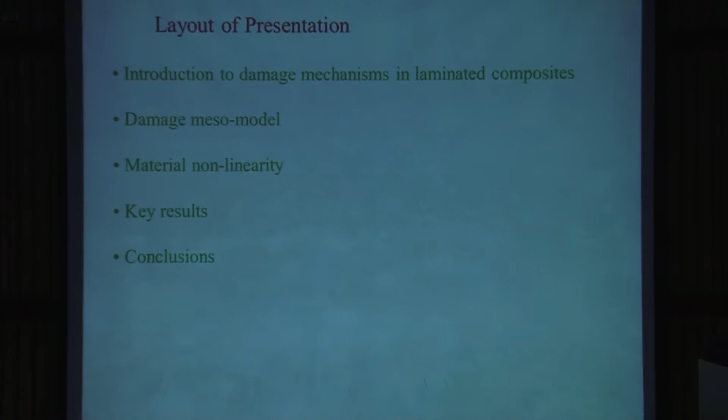So this is the layout of my presentation. First I will introduce various damage mechanisms in the laminated composites. I will be talking about the unidirectional fiber composite. Then I will talk about a particular damage meso model, introduce what is meant by damage, what is meso model, and where you get this material non-linearity. Then I will present some key results and conclusions.

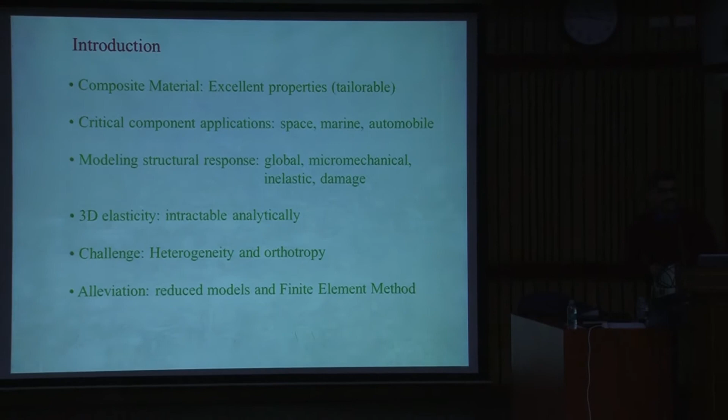As you know, these composite materials have excellent properties, such as specific strength, stiffness, and so on. Depending on that, you have different applications. One of the important properties of these materials is that you can tailor any of the properties. That is the biggest advantage of the composite.

So they find applications in critical components in the space industry, marine industry, automobile, civil, and many other applications. When you are talking about these critical applications, you are also talking about modeling the structural response. This can be a global response, a micromechanical response, inelastic or plastic, and damage. As far as I recall, some of these things have been talked about already - for the global response, I think buckling has been covered. I think we will be talking about snapback and other things - Professor Padevi is going to talk about that.

I think this part is micromechanical - are you doing any micromechanical? No, no, okay, so this part is not there. But I think Professor Pritam Chakravarti is going to do the inelastic part and the plasticity part. So I'm going to fill this damage part.

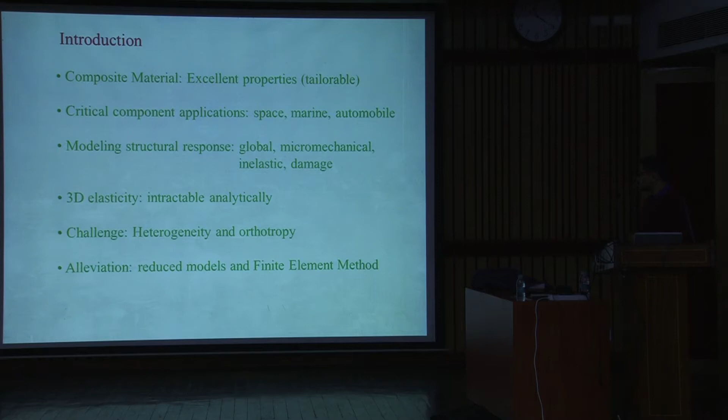So there's one more challenge when you go for composite material - that is heterogeneity. This composite material is composed of two or more different materials, so it leads to heterogeneity, and another thing is that it is orthotropic in behavior. Unlike metals, which are generally isotropic, this is orthotropic in nature. So what is done in case of composite modeling is that you use reduced models - you make some assumptions depending on your structure, orthotropy, heterogeneity, and so on, and then you come down from 3D to 2D or 1D line. Once you do that, you find approximate solutions by using the finite element method.

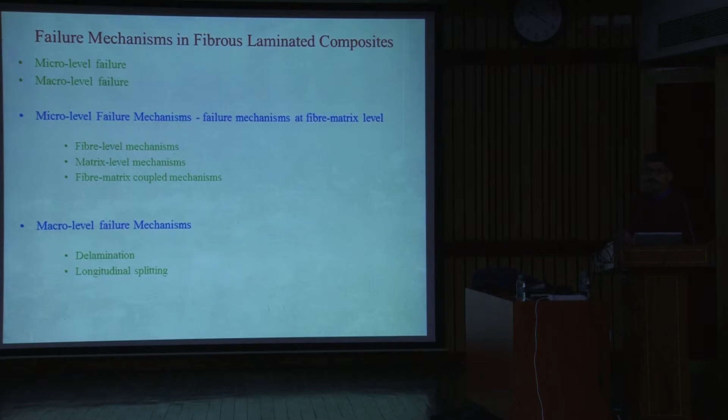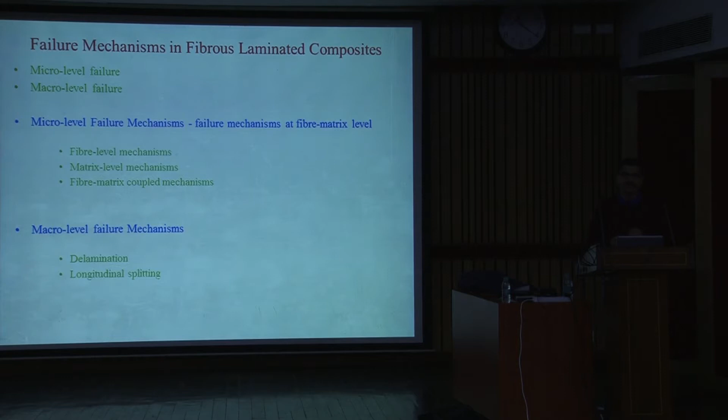So I will now introduce the failure mechanisms that are generally seen - these are the key failure mechanisms in fibrous laminated composites. These can be categorized at two levels: micro level failure mechanisms and macro level failure mechanisms. Micro level failure mechanisms are the failure mechanisms at the fiber and matrix level. Since I'm sure you are aware of composite materials, I'm talking here about fiber reinforced polymer composites - fibers of carbon and glass.

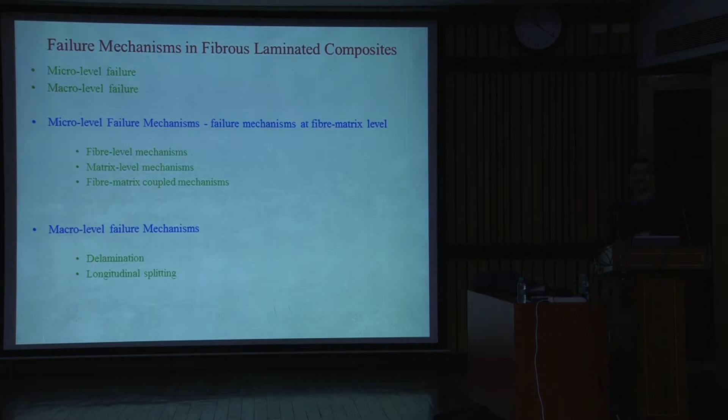These fibers are generally in micron sizes. The diameter of the carbon fiber is about 6 to 8 microns. In case of glass fiber, it is 15 to 20 microns and so on.

So you are talking about the failure mechanisms at the fiber level. That is why they are called micro level failure mechanisms. Again, you can categorize them as fiber level mechanisms, matrix level mechanisms, and the coupled mechanisms. So failure in fiber will lead to failure in matrix, or failure in matrix will lead to failure in fiber. These are the fiber-matrix coupled mechanisms.

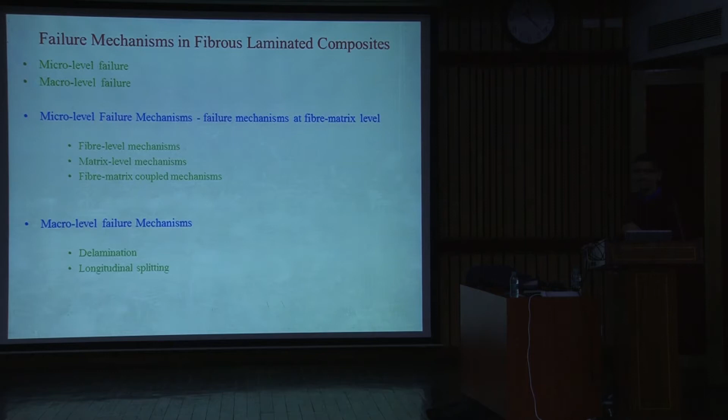Then we have micro level failure mechanisms. Generally these happen in a ply, or in a single lamina, so these are also called intralaminar failure mechanisms. Whereas the macro level mechanisms happen at the level of structure. One of them is delamination, and the other is longitudinal splitting, or a coupled macro mechanism. I will show those pictures.

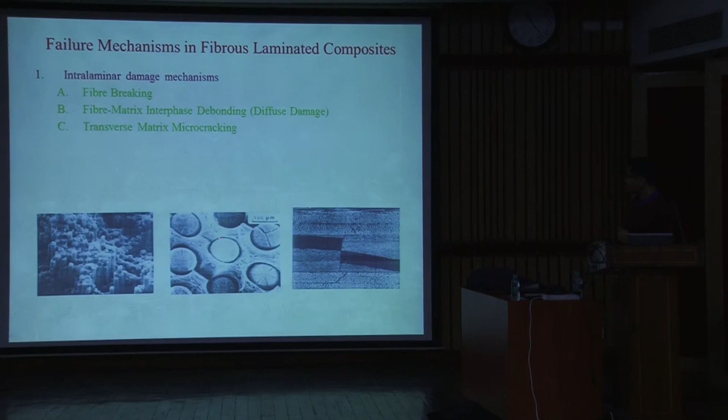Then you have fiber matrix interphase debonding or diffuse damage. This micrograph shows the fibers - these circles are the fibers, and this is the matrix material. The bond between fiber and matrix becomes weak, and there is a failure. This is called diffuse damage.

Another form of damage is transverse matrix cracking. What happens is there is a crack in the ply. This is a laminate, so it has different plies together. In this ply, the fibers are going into the screen. You can see here that there is a crack going through the thickness of the ply. Similarly here there is a crack going through the thickness of the ply, and similarly here.

This happens when the longitudinal strength of the fiber is exceeded. At that time it fails. This is one of the reasons.

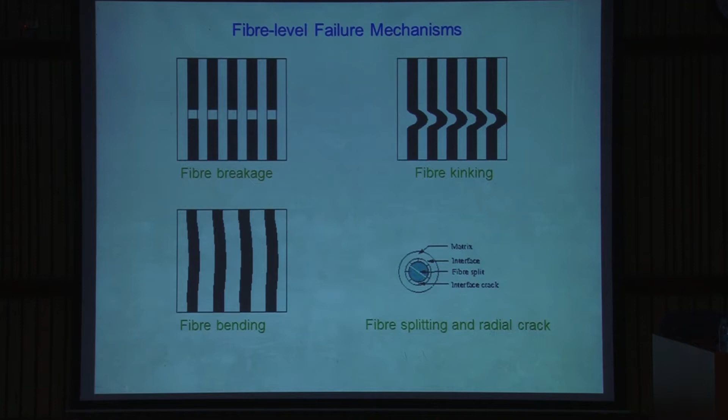Then another is fiber kinking. As I said, these fibers are very thin - just 8 microns or 20 microns - and they come in a bundle. You will have a bundle of 6,000, 12,000, or 18,000 fibers or so. You cannot have individual fibers alone; they come in a bundle. Because of handling or some other reason, it is possible that it may have some kinks at some places. This is called fiber kinking.

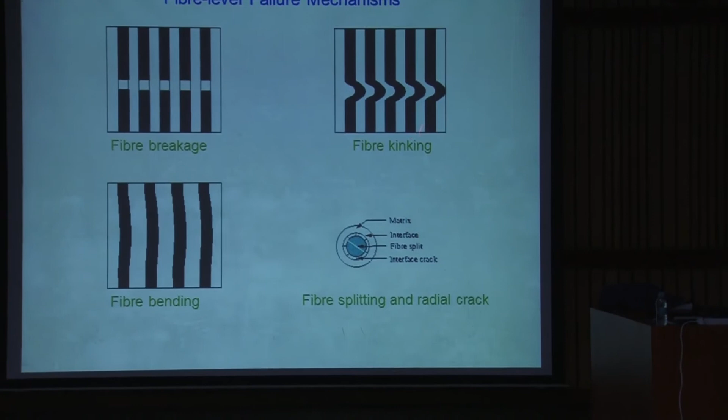Another mode of failure is fiber bending. These are long fibers, so when you are putting them in the matrix material, or making the composite material, it is possible that you are not stretching them sufficiently, and when they are set or cured along with the matrix material, it is possible that there is a bending in the fiber.

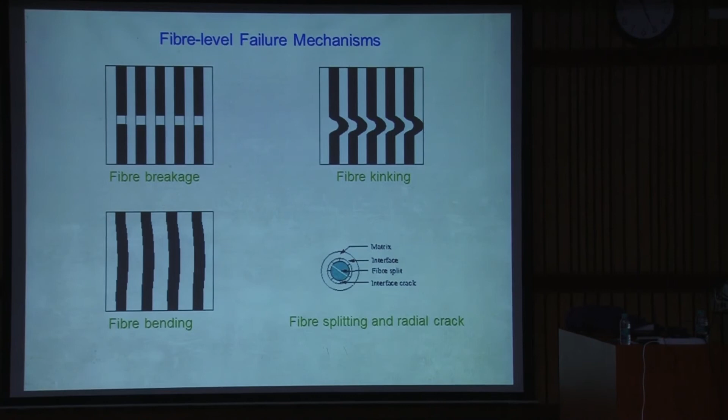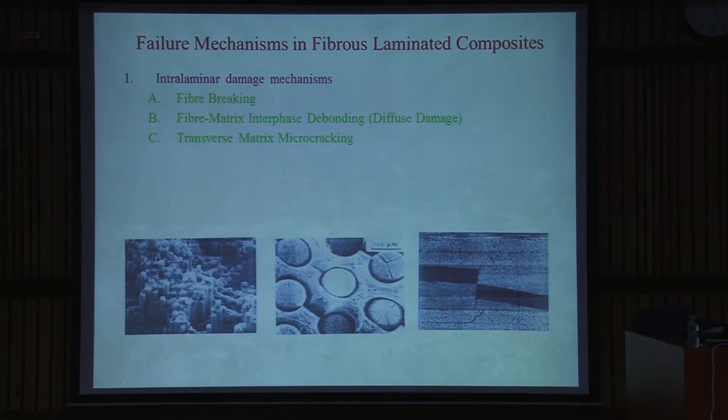This is one more level of fiber failure - fiber splitting and radial crack. Let me go to the previous picture. As I can see here, this is the fiber, split along the radial directions. Here it is split in two halves, whereas here you see that there are radial cracks developed into this.

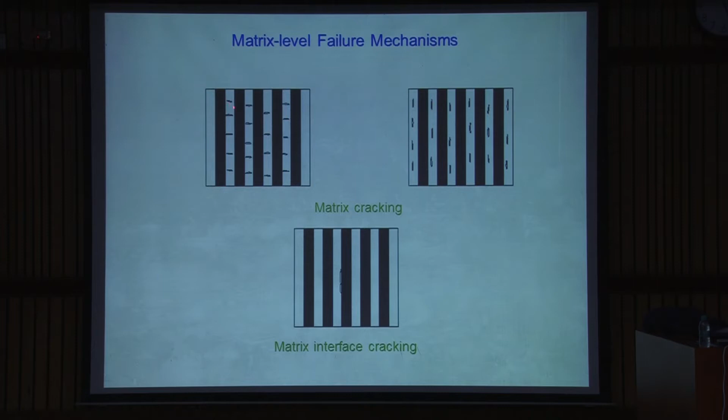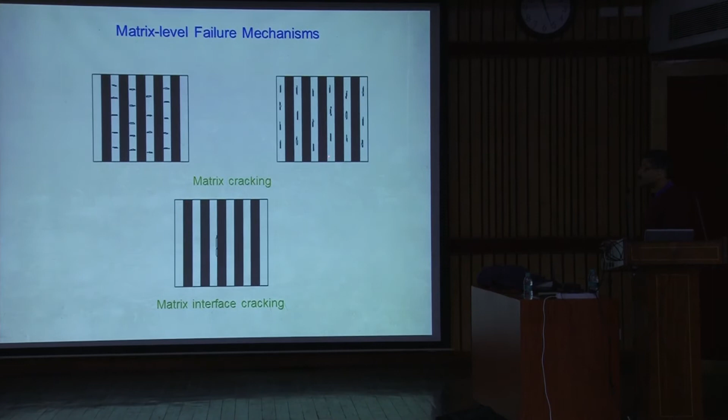Another level of failure is that this matrix between the adjacent fibers can develop cracks. There are two types of cracks: one where these cracks develop perpendicular to the fiber length, and another where they develop along the fiber length. Depending on the loading and the strength of the matrix material, either of these is possible, or both.

Then another type of failure is matrix interface cracking. What happens is that at some places there is not a proper bonding between fiber and the matrix, so the interface between this fiber and the neighboring matrix is weakened and it develops a crack.

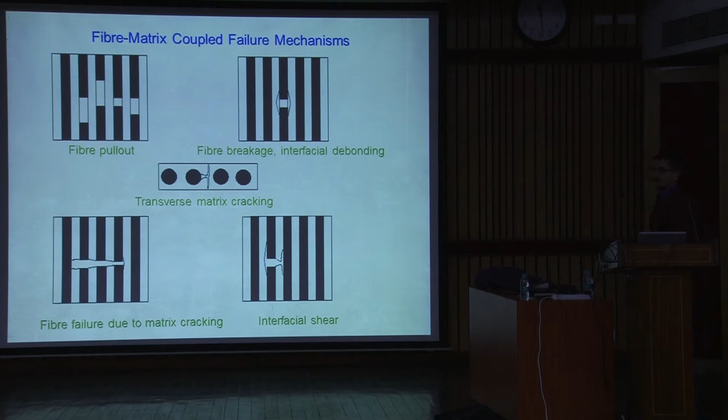At the macro level, this happens at the structural level when you have two plies joined together - there is a separation between these two plies. This can be internal, at the edges, or anywhere, depending on the loading situation and the structural detail levels. This separation is called delamination. I have the same picture again in the next slide, I will explain that.

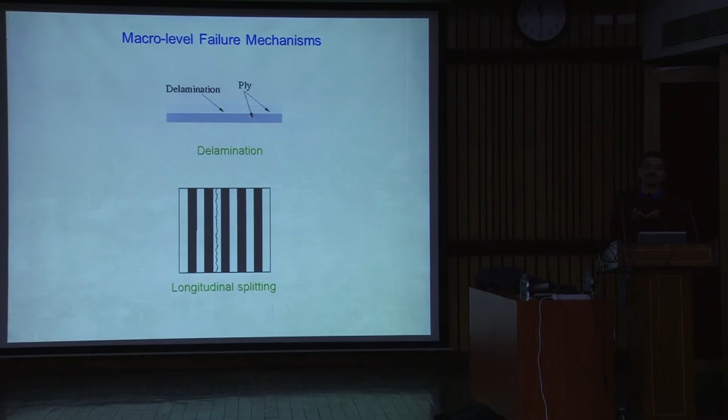As I said in the previous slide, the ply can split along the fiber. The crack that develops in the matrix material goes along the fiber length through the thickness of the ply, and the entire ply is separated. This is called longitudinal splitting.

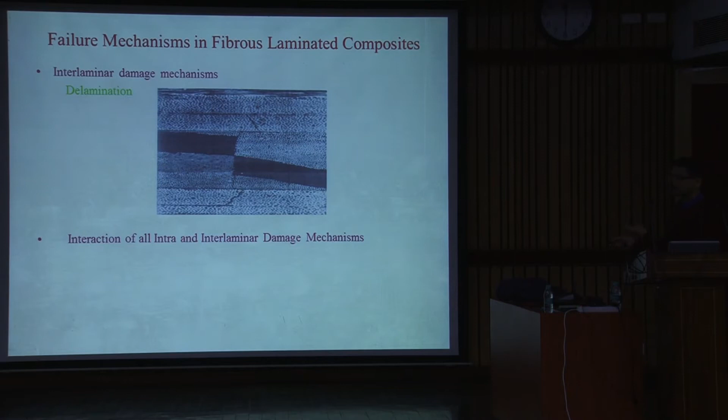So this is the delamination. As I said earlier, there are many layers, and what you see here is the interface between this ply and the next ply. This black region is nothing but these plies having been separated - they have delaminated and come apart. The bonding between these two plies has become weak due to the loading or some other reason, and then it separates.

This shows the interaction between intra and interlaminar damage mechanisms. There was a delamination propagating like this, then it sees that it cannot propagate along this interface anymore. So it found a weak direction in the ply itself - the interfacial crack or delamination that was growing along this path moved in the thickness direction and goes into the next interface.

Then again it sees that the next interface below is weak, so again it propagates like this. Also here, when it was separated, it found there was a weakness in the ply, which led to the crack. So these mechanisms are coupled - this matrix transverse cracking can lead to delamination, or the delamination can lead to matrix transverse cracking. These are the coupled mechanisms.

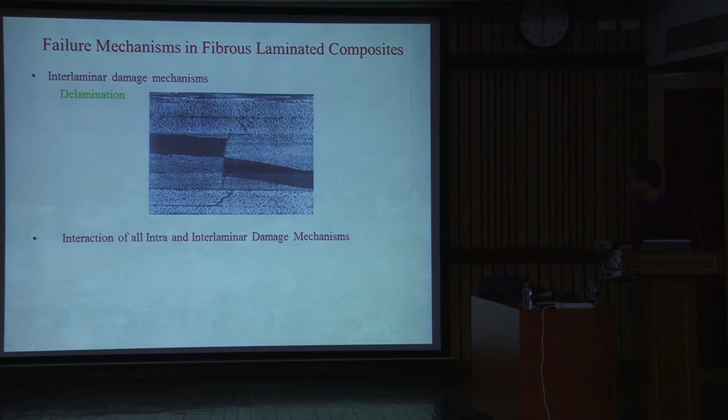Okay, so with this introduction to the various damage mechanisms, now let us see how do you take care of this failure. These failures are at the macro level, so how do you take care of this failure, or how do you characterize it and how it is taken care of in your material behavior.

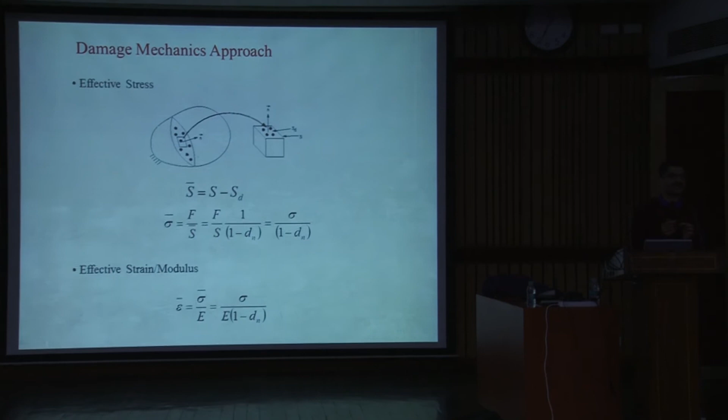So this will go maximum to 1. When SD becomes equal to S, then it becomes 1, and when SD is 0, Dn is 0. So that means your damage parameter will vary between 0 to 1. 0 means there is no failure, and 1 means it's complete failure. So this is how your effective stress has been represented.

So if I further work with the stress-strain relation, then I can also define the effective strain. If I do that and replace this effective stress, then what I see here is the nominal stress divided by E times 1 minus Dn. So E is your original stiffness. Now, because of the damage, it has been reduced by this factor 1 minus Dn.

So the effect of this damage can be characterized in the material through the reduction of the stiffness. This is just one simple example where the concept of the damage variable, effective stress, effective strain has been introduced, and how you take care of this damage through the reduction of stiffness. This is the source which will give the nonlinearity, because as your load is changing, these things are changing, your stiffness is changing.

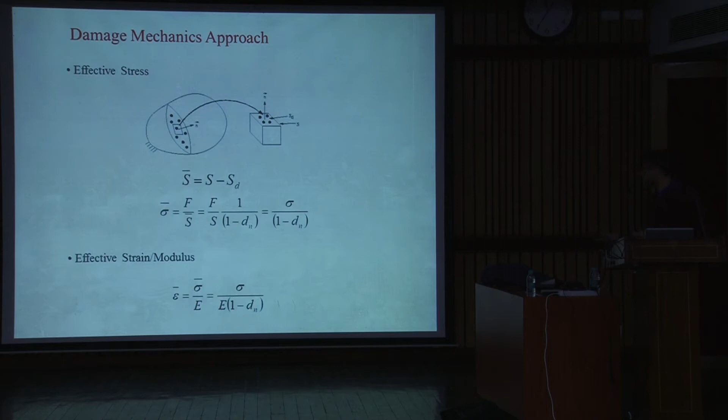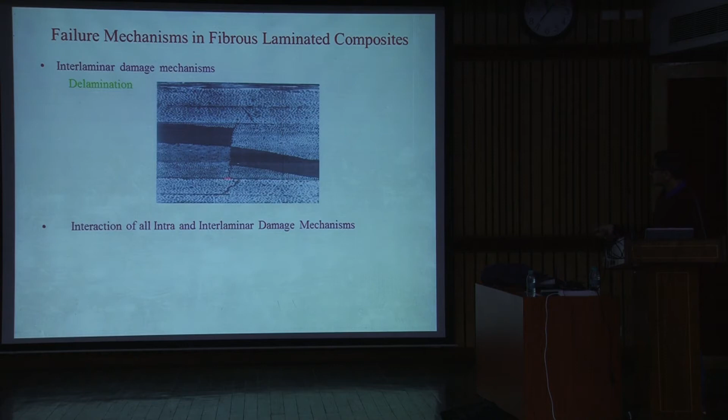So the first assumption that is made is the mesoscale. It means you are breaking, or assuming, this laminate as alternate stacking of layer and interface. Layer means you have the matrix and the fiber, and in the interface it is pure matrix material, a very thin layer made up of matrix material. So you are talking about these scales - this is the ply which is of thickness 0.15 or 0.125 millimeter, that is about 125 microns. So this is the scale you are talking about.

This is neither the micro nor the macro scale. So this is in between that. That is why it is called mesoscale.

So you are characterizing the failure in individual ply and individual interface, and these two things will combine alternately to form the laminate. So this is the first assumption.

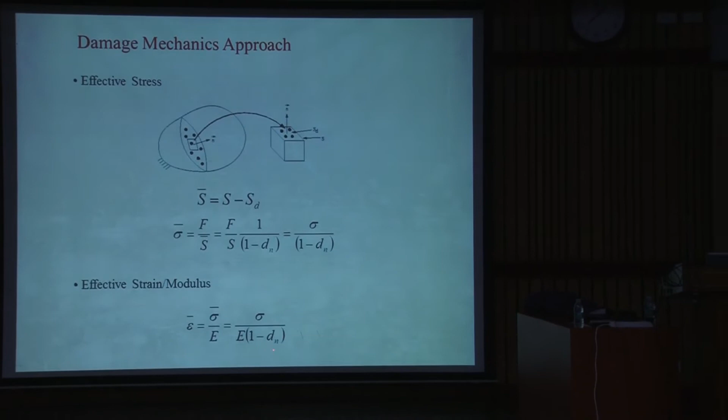The second one is the internal variable approach. It relates the effect of damage to mechanical behavior. So this is the same thing I said, it relates the effect of damage to the mechanical behavior. So your E gives the stiffness, that is the mechanical behavior.

So your Dn is called the internal variable. Okay.

Then the method of local states. It relates the damage to the thermodynamic forces associated with the strain energy. This thermodynamic force is nothing but the dual of this damage indicator. So when you have this damage indicator and thermodynamic force together, it will give you back the energy, or strain energy, or the free energy.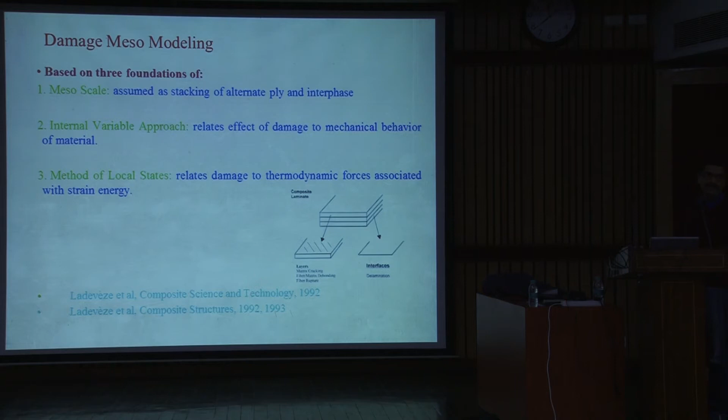So with this, now we will do step by step how these different failure mechanisms affect your stiffness. In this development, only the key or important failure mechanisms have been considered. The first one is fiber failure.

As you know, in the composite, fiber is the main load carrying constituent. So majority of the load, when it is applied along the fiber direction, is carried by the fibers. If the fiber breaks, because it has more stiffness compared to the matrix material, the stiffness of the lamina decreases drastically. So this is one of the important failure mechanisms.

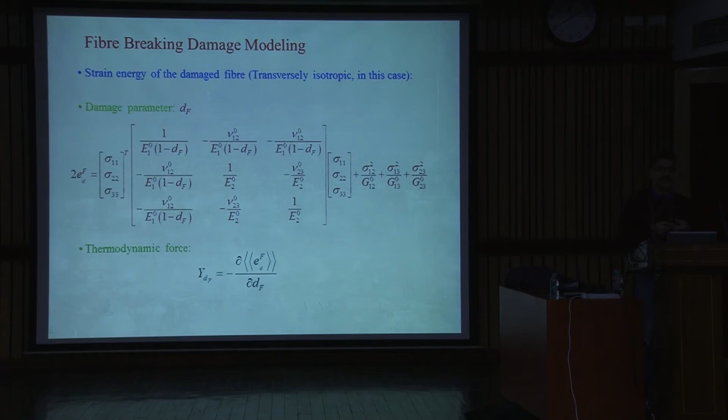So one more assumption is that when you are considering the fiber failure, it will affect only the modulus in the fiber direction. Its effect on the failure in the other direction is lesser. If the fiber is broken, then it is almost catastrophic failure. There is no chance that you will have some failure in the other direction and then this will fail. So it is the assumption that if the fiber is going to fail, it is going to affect only the stiffness in the fiber direction, that is direction E1.

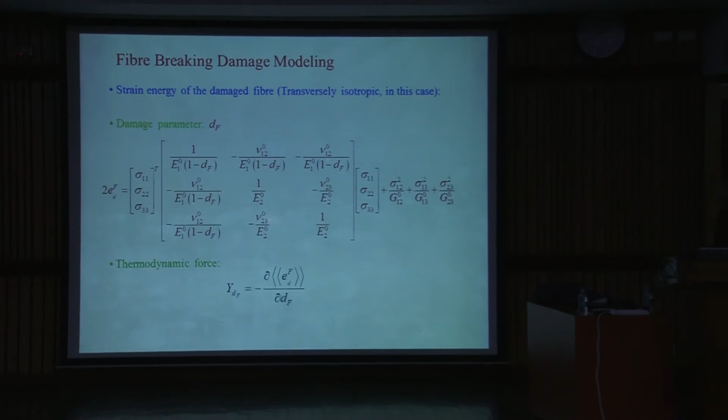As we said, this material is orthotropic, so you will have E1, E2 and E3. E2 and E3 are the same because this material is transversely isotropic, meaning the behavior in the 2 and 3 directions are the same, but in the 1 direction it is different.

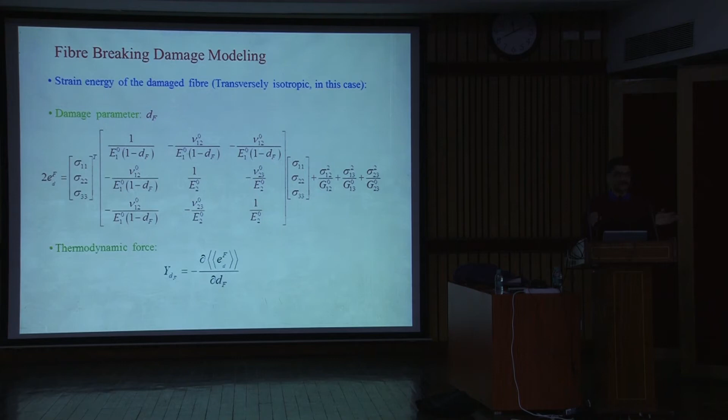So this is the strain energy of the damaged fiber, given like this. It is affecting only the Young's modulus in the length direction of the fiber, not affecting any other direction. And if this is your strain energy, then you can define the thermodynamic force in this way, where dF is the damage indicator for fiber failure.

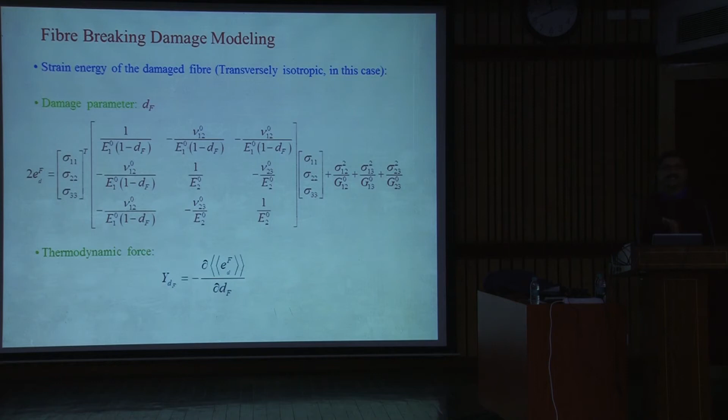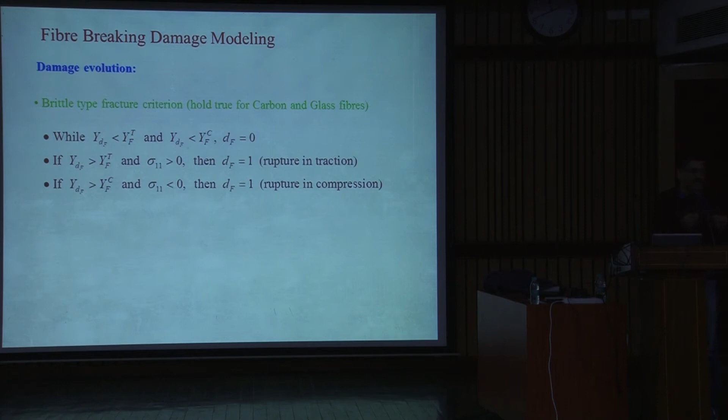So how do you evolve the damage? You are talking about now when it is going to happen, and when it is happening, how it will propagate. So you are talking about the initiation to its last stage. In this case for the fiber, you are talking about this thermodynamic force.

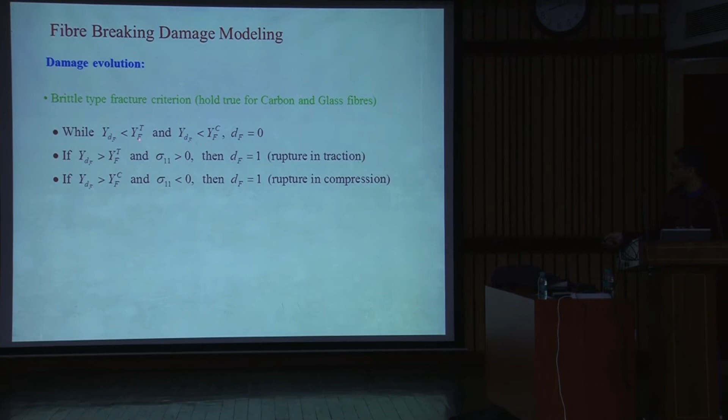So if this thermodynamic force, whatever you got, is less than the thermodynamic force in tension and compression, these critical ones, YFT and YFC, correspond to the maximum strength of the fiber in tension and compression. I can do a similar thing here for maximum stress in the fiber for tension and compression, so that is basically the fiber strength in tension and compression.

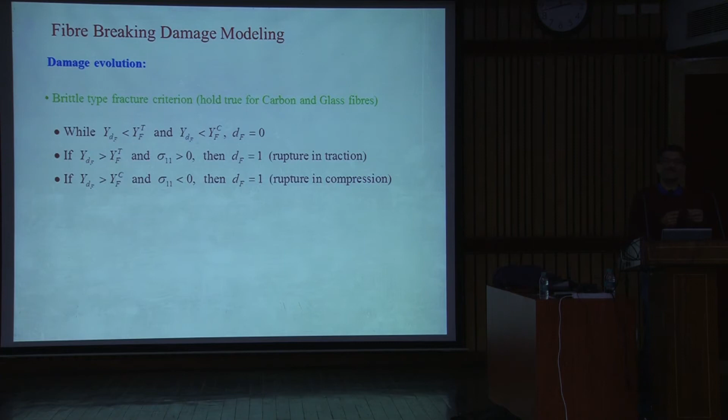Then, if the stress in the fiber along the fiber direction is tensile, I will compare it with the tensile critical thermodynamic force for the fiber. If it is more, then I will have this damage indicator as 1. Why am I putting 1? Because for carbon fibers and glass fibers, the failure is brittle. So either it will go on stretching until ultimate failure, there is no failure increasing step by step. It is either intact or complete failure. So that is why it will be either 0 or 1, both in tension and compression.

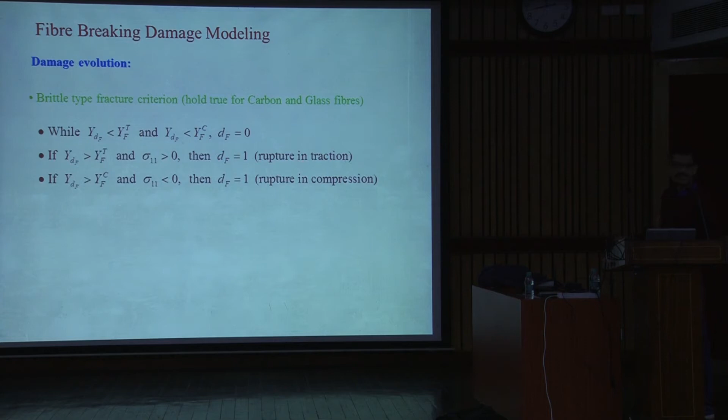So now for the case of the fiber matrix debonding, there are different things happening. You have the bonding between this fiber and the matrix. If it is weakened, then what is going to happen? In this direction, the strength is reduced. In the shear also, it will be reduced in this direction as well as in this direction. So because of this, you have the effect of these damage indicators.

So 2,2 means in the normal direction to the fiber, then 1,2 and 2,3 are the shear effects. So your damage in the interface is going to affect your E2 modulus, and then also it is going to affect the shear moduli. There is one more assumption, that this damage is considered to be transversely isotropic, so whatever you have in this direction is also in the same direction, meaning in the plane direction as well as in the thickness direction.

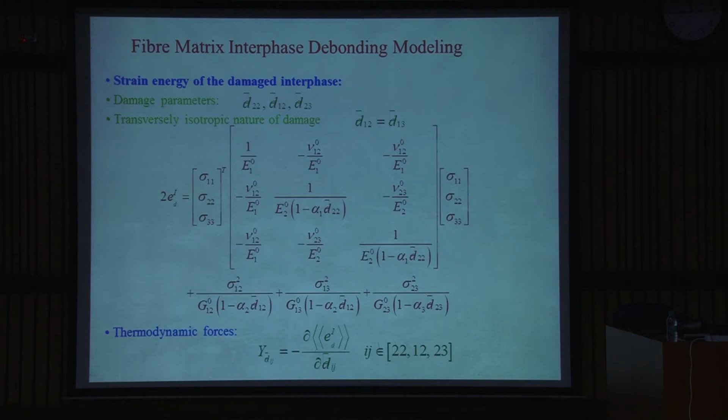So if I am considering only the fiber matrix debonding, and if I consider all these effects, then the strain energy that I get is this, and for these damage parameters I can have the associated thermodynamic forces which are defined like this.

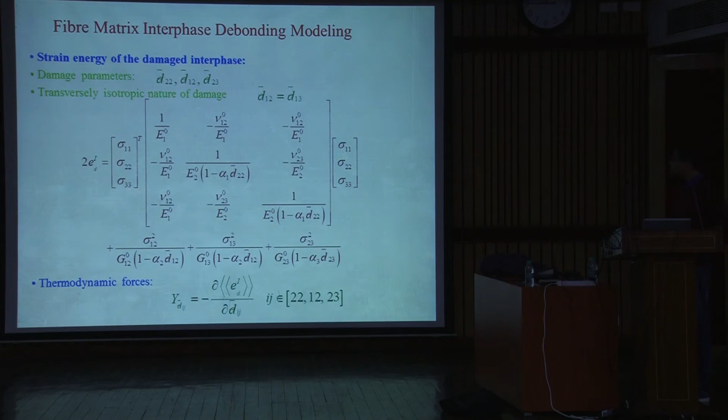But still this also happens, and its effect is less than 5% on the material degradation, and sometimes it goes undetected. So when you are characterizing, or doing the NDT, you should be very careful to quantify these numbers.

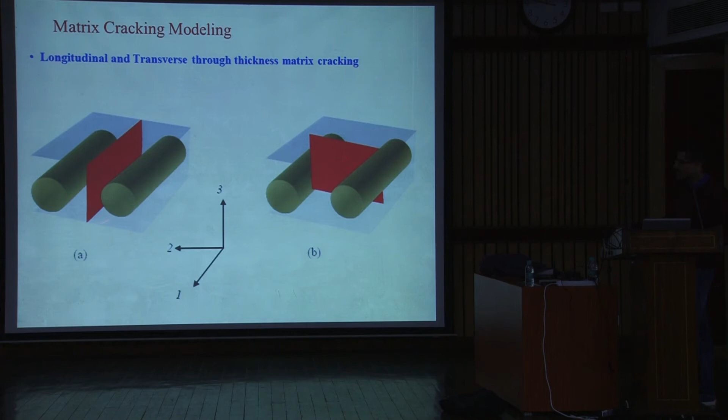So if I consider that matrix cracking, then what is going to happen? This is going to affect your strength or the stiffness - stiffness in this direction, longitudinal the fiber direction, and then in the shear directions. So my stiffness in the longitudinal direction, perpendicular direction to the fiber in this plane, and in the shear is going to be affected. So these parameters are, now you see, affecting your stiffness in two directions and the shear.

So for this strain energy, now you can again define, or you can get this associated thermodynamic forces for these damage variables.

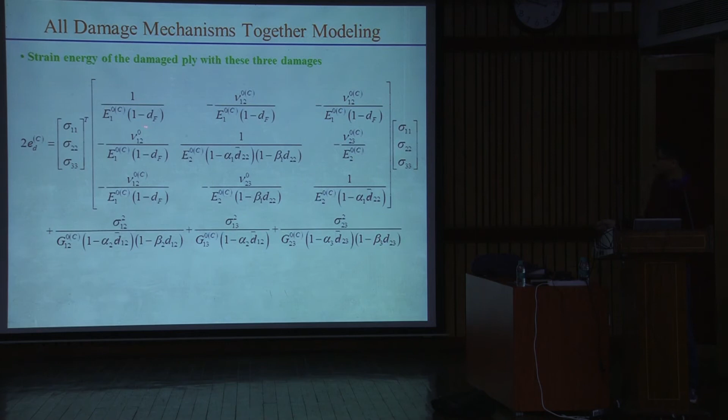So what we did is that we consider these different mechanisms together now. Individually, first we talked about the fiber failure, then how it is going to affect the stiffness matrix, then we talked about the fiber matrix debonding, and then we talked about this matrix cracking. So when we put all these things together, this is what I will have in my stiffness matrix.

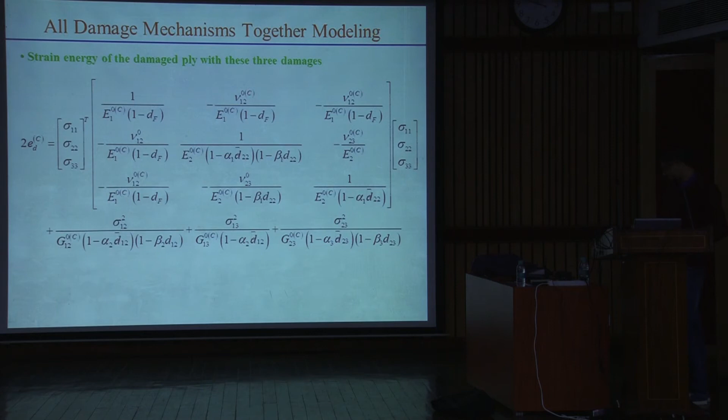So now what is left? Now the failure at the macro level, that is the delamination. In delamination, the initiation is given in terms of von Mises stress criteria, because the matrix material is assumed to be isotropic in nature.

So I can apply von Mises stress criteria. But for the propagation, what we are doing is defining the strain energy of the damaged interphase. So you will have the damage propagation for delamination in 3 modes: mode 1, mode 2, and mode 3, sliding mode and opening mode.

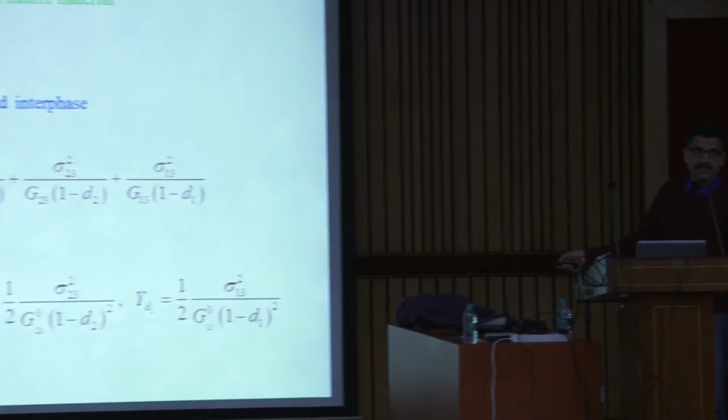So you have 3 different modes. For each mode, now you have different indicators. In case of the opening mode, the crack will propagate, it is assumed the delamination will propagate only when the stress is tensile. If it is compressive, then there is no damage developed into that.

So this is the strain energy of the damaged interphase. Corresponding to each damage indicator, you can define the thermodynamic force. What is it?

Yeah, you can do that thing, but von Mises is like you are considering all the things together, it's an energy based criteria, so you have all the things together. You can also do that thing for that. So here also you can do that thing. If you want, you can check the individual one and then you can do that.

But whereas for the initiation, that is more appropriate in case of isotropic material. So that is why von Mises criteria.

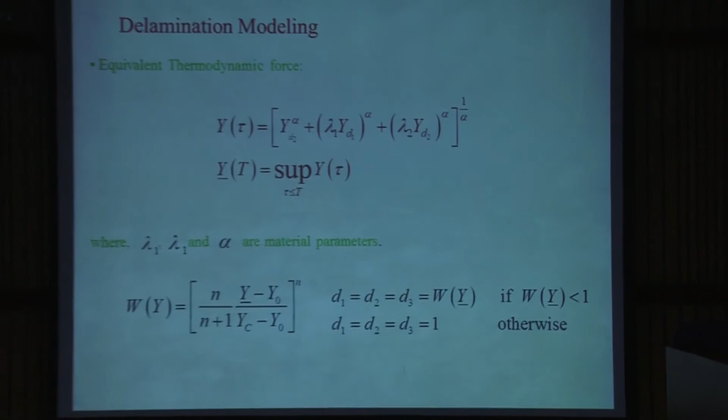For the propagation, what is done is now you are talking about 3 modes. I don't want to do individual mode one by one, so what is done is you define equivalent thermodynamic forces when you are having all the 3 modes. This thermodynamic force is basically trying to capture the mixed mode failure. Whatever is written here is just a modified form of the mixed mode fracture.

Of the delamination, depending on that you will have this lambda 1, lambda 2, alpha, and these parameters. You will get, depending on what the strain energy is when you have mixed mode failure, you do a parameter fitting and then you can get these material parameters.

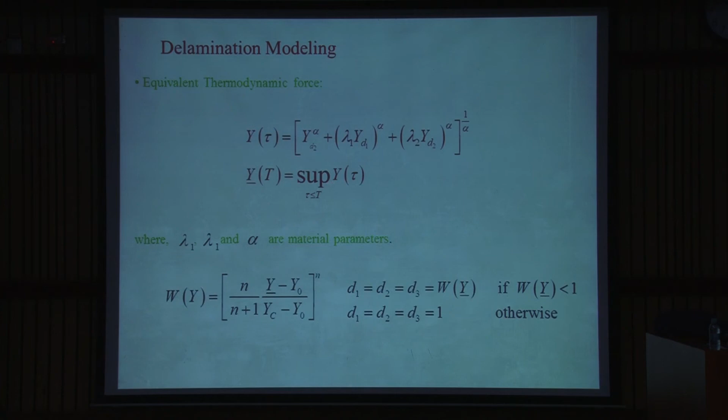One more thing defined here is that the crack will propagate only when the thermodynamic force in the next step is greater than the thermodynamic force that you have in the previous step.

Based on the behavior of the matrix material, whether it is a brittle material or a ductile material, you can do slightly one more fitting based on the indicator N, so you can get the corresponding damage indicators. In this case, instead of having a separate indicator for each mode, only one indicator has been used, meaning the failure in 3 modes will happen simultaneously, together.

So one more thing in this damage is that, if I look at the delamination part, in the opening mode the delamination will propagate only when the stress is tensile in nature. The same thing is assumed for other modes: when the state of stress is locally tensile, then only there is the possibility of damage growth. If locally the state of stress is compressive, then whatever damage was there earlier stays.

So with this, now we will see how it has been implemented. You have this input data on all these things, process the material properties without damage, then go for the load increment. Then you first solve for displacement, non-linear, because you have non-linearity due to this damage. Then you compute the stresses. Once you compute the stresses, from these stresses you go back and find the strain energy of the damaged ply or interphase, and then find out the damage indicator.

So if the damage indicator is more than 1, then you have to reduce the load step, because that means you have exceeded the damage indicator, so you cannot do that. Go back and reduce it. If not, then you update the damage indicator and go for the next loading.

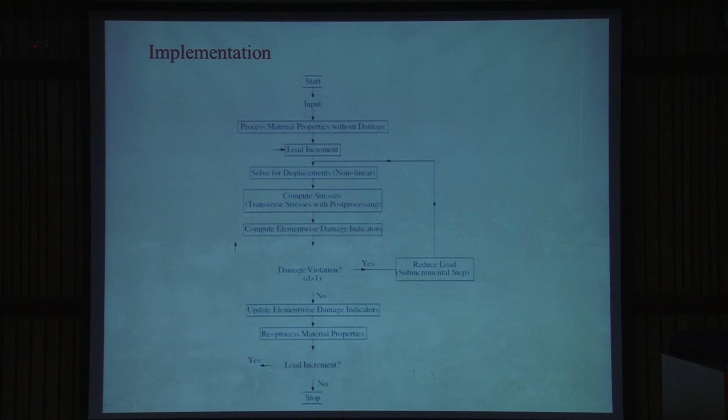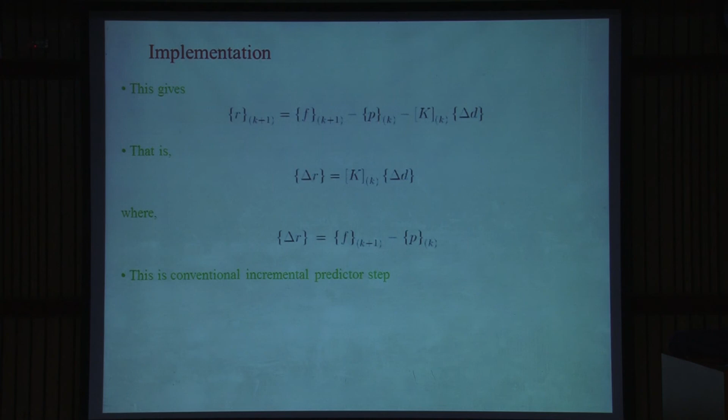Now in the corrector step, the displacement for the k plus 1 step is updated as uk, that is the displacement at the previous increment, plus whatever displacement you have got for the current load increment. With this solution, once you have it, you can obtain the stresses. Once you have the stresses, then internal forces are obtained.

When you are obtaining the stresses, there is one more step: you have to update your damage indicators. Damage indicators are updated when you are updating your displacement from k to k plus 1 step. That way you will get the internal forces, then you update your residue, which is not 0. Then you apply the corrector step, given like this.

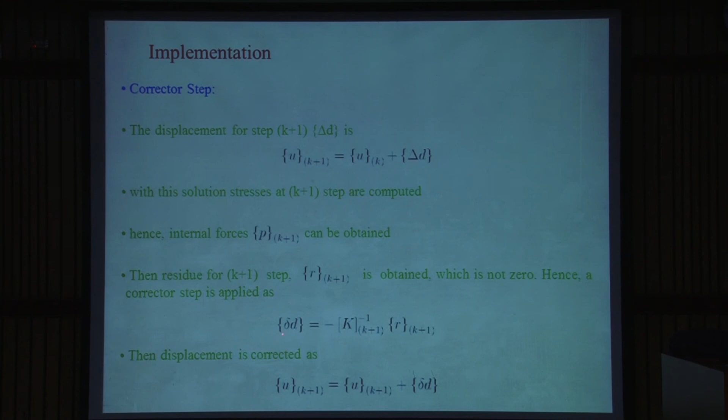So this is the corrector displacement, given in terms of the current stiffness. Now, from the previous step to this step, you have updated your damage indicators. With this, now you will get the corrected displacement.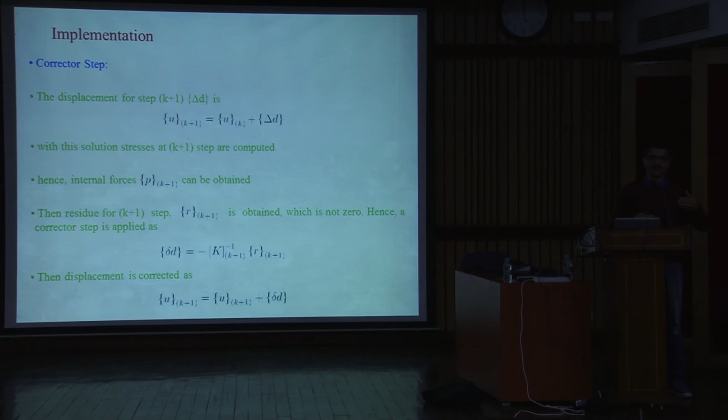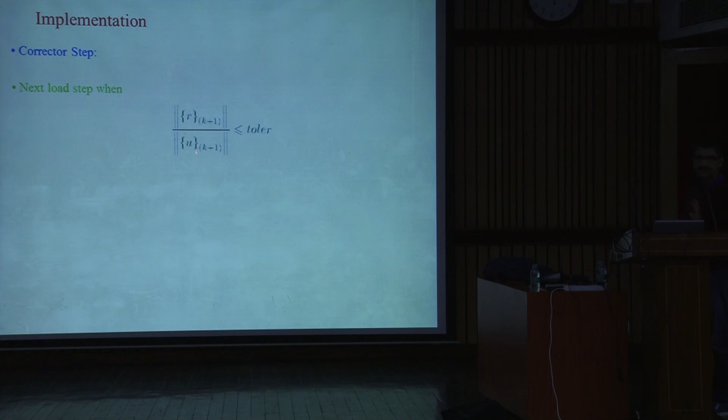In this entire process, you have to ensure that when you are starting from the step to the end, the damage indicator, whatever you started with and what you are at the end of the step, should be the same. Once you get this, you will stop when you reach the tolerance. You should ensure that whatever damage indicator you started with in that particular step, it should be the same for the corrector step.

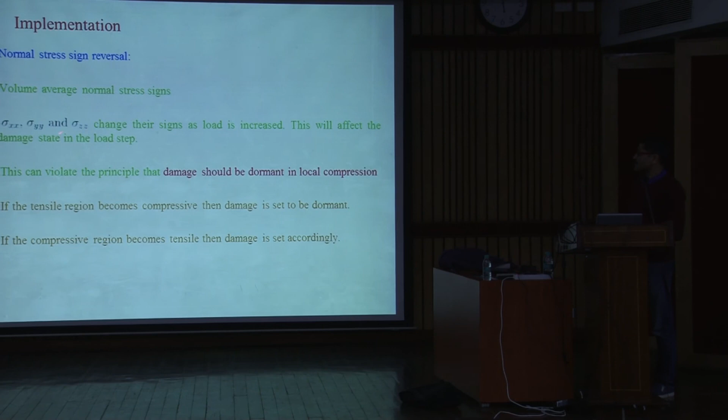Because the normal stresses sigma xx, yy and zz may reverse signs, that is compression will become tensile, tensile may become compression, and so on. At each step, you have to take care that we do not want this damage to increase during compression. It should remain dormant in local compression, and it should grow only when the region becomes tensile.

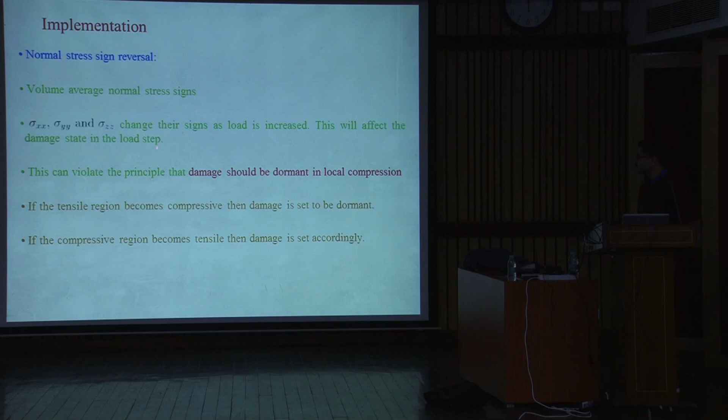So if that region is tensile, you have to go back and look at the damage indicator and the corresponding thermodynamic forces, and depending on them, if your damage indicator is more than the previous one, only then are you incrementing or updating your damage indicator. Otherwise you go with whatever is in the previous step. Because of this frequent reversal of local tension and compression, you have to ensure these damage indicators or regions remain consistent within your load increment.

So this is what is depicted in this figure. Now I present some key results. I'm not giving the details of this material, I'll just say it is a classified material, so I'm not giving details. I'm going to talk about some key results.

This is a 0-0 laminate, a very simple laminate that has been taken, and this is the growth of the fiber breakage. We have considered a laminate with a hole, and the load is applied along this axial direction. So this is the evolution of the damage failure, of the fiber failure.

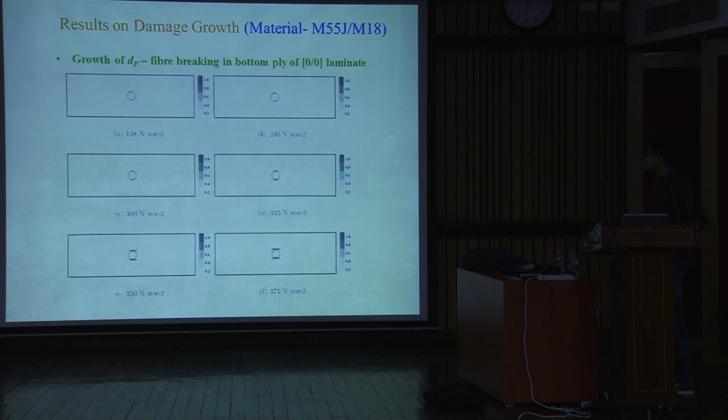So it starts at this location of this hole, and as your load progresses, you see that this fiber failure is only in this limited region. We have not gone to the level of a complete failure of this plate.

So this is the matrix cracking in the 0-0 laminate bottom layer. The matrix cracking can also take place, and again it starts in the region where you have the stress concentration. If you are applying the load along this direction, you will have more stress concentration here and here. So this matrix cracking takes place here, and it grows like this, along the length of the fiber. So this is the preferred direction of this matrix cracking.

I'm not sure if you are able to see it. This is at one level. There is some other region which is at slightly lower intensity, meaning the damage is slightly lower. You can see it is propagating here, then at some stage, towards the end, it also starts from the edges, because now your material has degraded and it is showing its effect at the edges also.

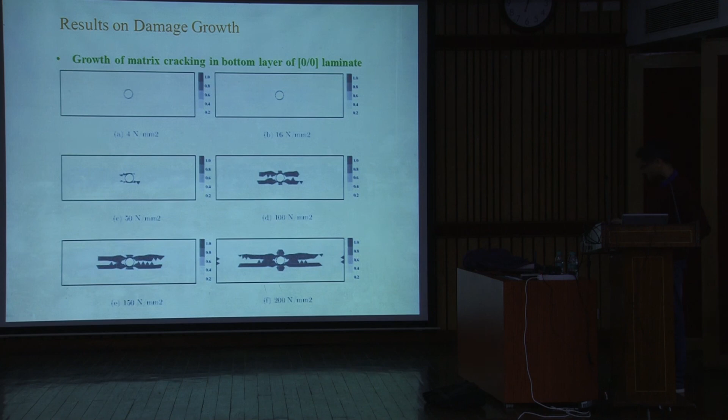Then this is delamination in the 0-0 laminate. I think you are not able to see it, but the level of delamination you see is very small. So it is not actually delamination, but you should interpret it as the interface between these two plies being weakened. This is not a complete delamination in this case, because what we are doing is just reducing the stiffness of the interface.

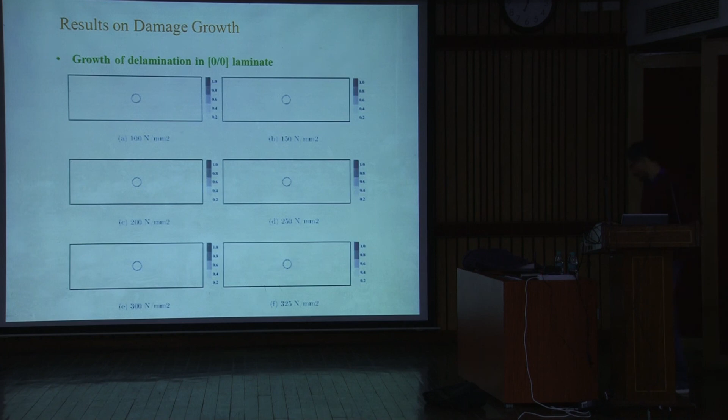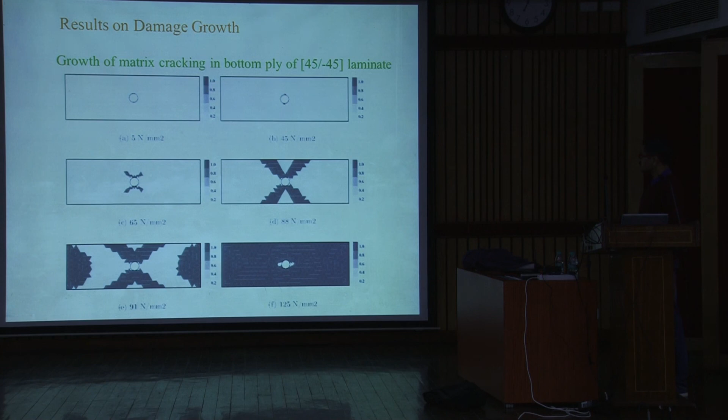So this is another laminate, the plus minus 45 laminate, and what is shown here is the matrix cracking. The matrix crack starts from this edge of the hole, and as you can see, it is going in this direction and this direction, which is nothing but your plus minus 45 fiber direction. So you see the matrix cracks grow along the fiber line. This is the preferred orientation of this matrix cracking. At a certain stage, it also starts from the edges, and then there is cracking.

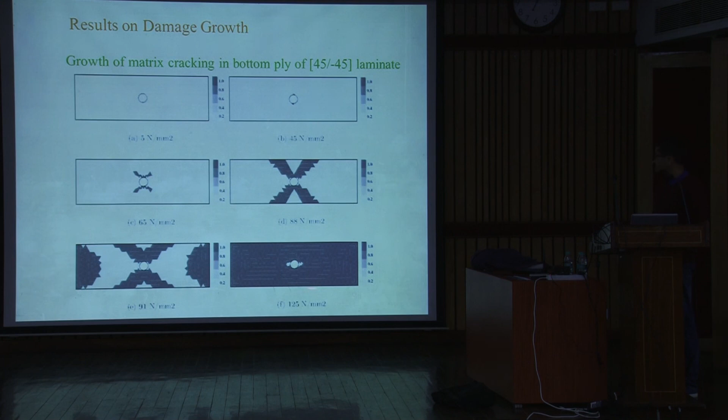As you can see here, you have these plies at plus minus 45, and the load is applied off-axial. So it is understood that the matrix will fail first, because the fibers are at some angle and not oriented along the loading direction, so the matrix is supposed to take more of the load. That is why you see the matrix cracking happening along these preferred orientations.

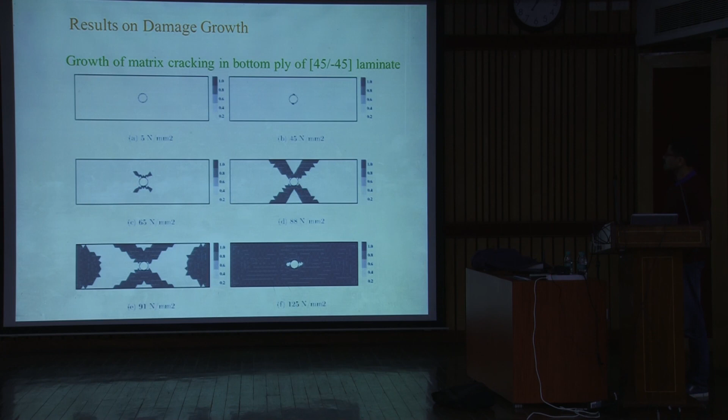So this is again the matrix cracking, similar thing you can see here in this case. I think the previous one was in a different mode, the shear mode, and this one was the normal mode, normal to the ply fiber direction.

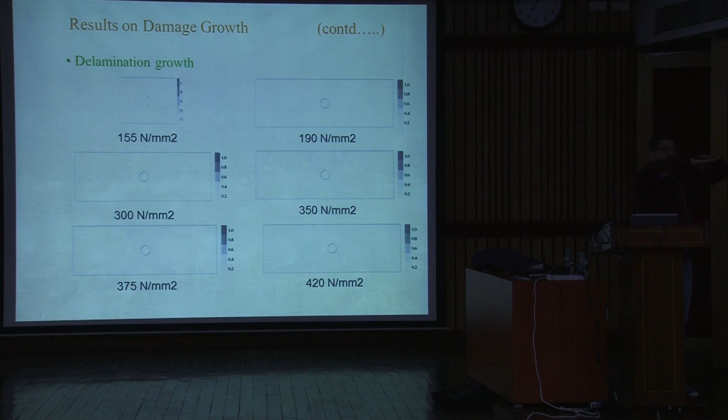So again, in this case also you see delamination. So what is happening? You have the plies like this, plus 45, minus 45, and the load is applied like this. So why do you see delamination? It's because when you apply the load, these plies try to orient along the loading direction, and that weakens the interface.

So the conclusions are just qualitative. We have covered this material non-linearity due to damage. The prominent modes like fiber breakage, matrix cracking, fiber matrix debonding and delaminations are modeled and implemented, and the results presented here are according to our expectations. In fact, we have some experimental verification as well, but I'm not supposed to disclose that, so that's why I have not given it.